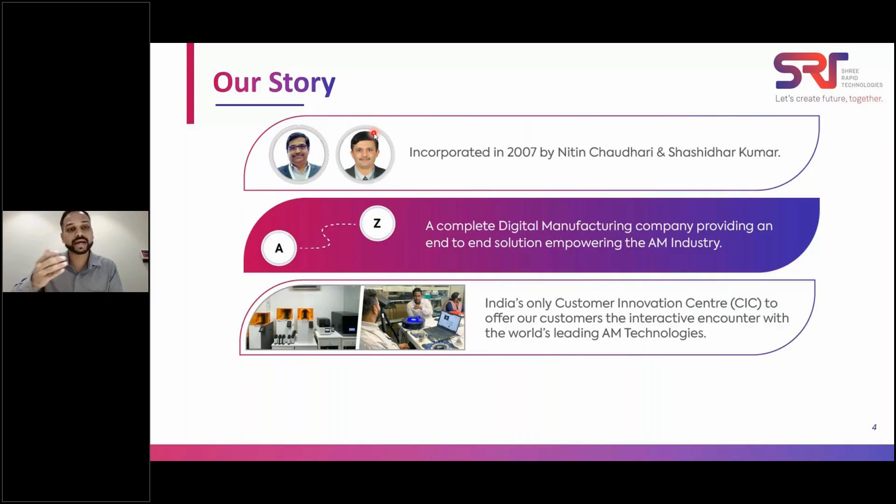Thank you, Sonal. Hello everyone, good afternoon. My name is Lakshman Gad. On the screen you see two gentlemen, Mr. Nitin Chaudhari and Mr. Shashidhar Kumar, who co-founded Shree Rapid Technologies in 2007 and established it as a provider of digital manufacturing solutions. We have a pan-India presence with our head office in Mumbai and branch offices in Delhi and Bangalore. Backed with 17 plus years of experience, we are a team of 95 plus and have installed more than 850 machines across India.

We offer a wide range of 3D printing technologies, starting from filament-based FFF 3D printers, resin-based SLA and DLP 3D printers, powder-based SLS 3D printers, metal 3D printing, multi-jet printing, and even ceramic 3D printers.

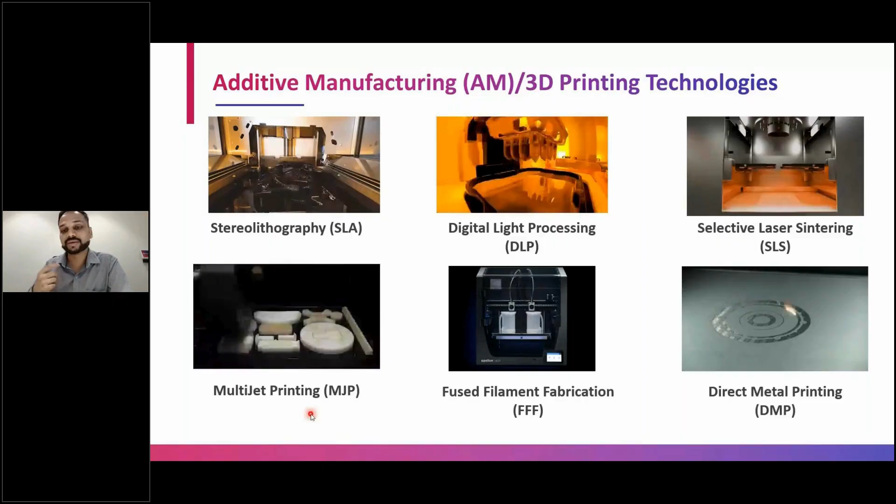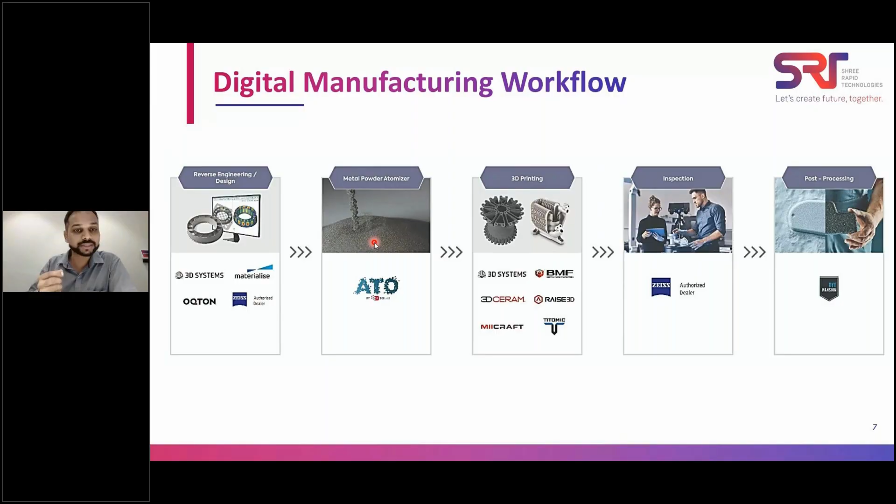The system you see here, ATO, will be discussed in detail during today's session by the expert Mr. Marius from 3D Lab. The most important part of Shree Rapid Technologies is our Customer Innovation Center, CIC, located in Mumbai, Marol, where customers can come down and understand the different technologies in 3D printing. You and your team are welcome to experience and witness the live working of different 3D printing technologies at our facility in Mumbai. So that was a brief presentation about Shree Rapid Technologies.

You should know that 3D Lab was founded in 2007 and we started as a service bureau. One year later, we signed a company agreement with 3D Systems. We are a reseller of 3D Systems here in Poland, like ShreeRapid in India. Few years later, in 2016, we signed a very similar agreement with Coherent as a partner.

Nowadays, they are called 2OneLab, and they are a manufacturer of small 3D metal printers. This time was crucial for us because between 2008 and 2016, we sold a number of metal printers, and those customers started asking us questions about new alloys, about small amounts of powders for testing and research purposes. That's why we realized there is a niche for a small and compact atomizer.

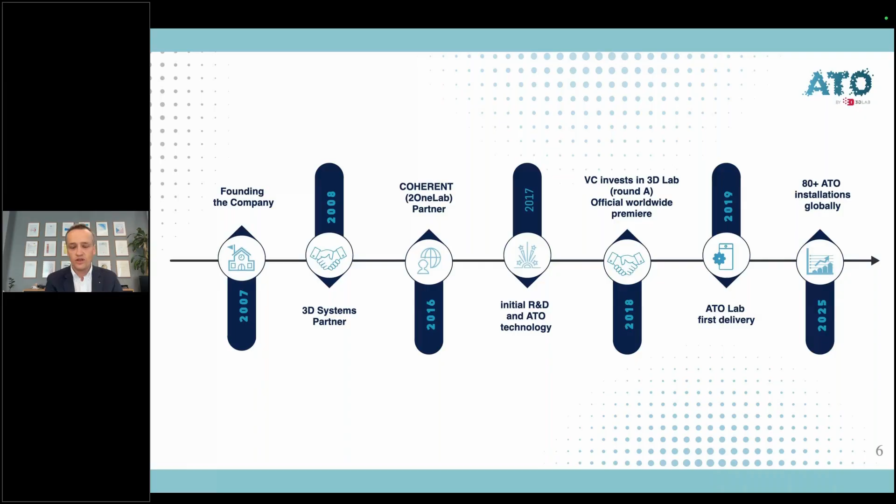That's why in 2017 we started investigating our ultrasonic atomization technology, which was born here in 3D Lab. The effect of that was the acquisition of an investment partner in 2018, and then we launched the first device in 2019. Since then, we've already sold more than 80 machines worldwide.

As you can see, our technology is closely related to the bottlenecks in the metal additive manufacturing industry and gas atomization technology, mainly because of the limited list of materials you can create with the classic gas atomizer, the very high price of those solutions, high operating costs, large space requirements, and a very slow material change process.

Based on our customer experience, if you would like to ask a big company equipped with a classic gas atomizer, you cannot ask them for a small amount of powder. In many cases, the minimum amount of powder you can order is 100 kg or 150 kg, and the material change process is very slow, as I mentioned. That's why it's not profitable for them to work with you with a very small amount of powder, like a few kg.

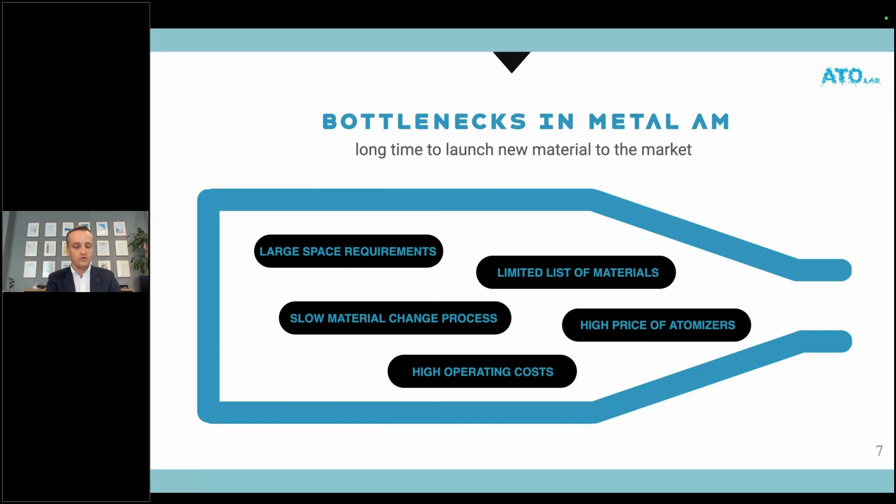During the creation of our technology, we were guided by the idea to avoid big construction and to avoid open fire. We believe we achieved three major goals by creating a very small and compact machine: to speed up new materials development, but most of all, we can propose it with a very, very affordable price.

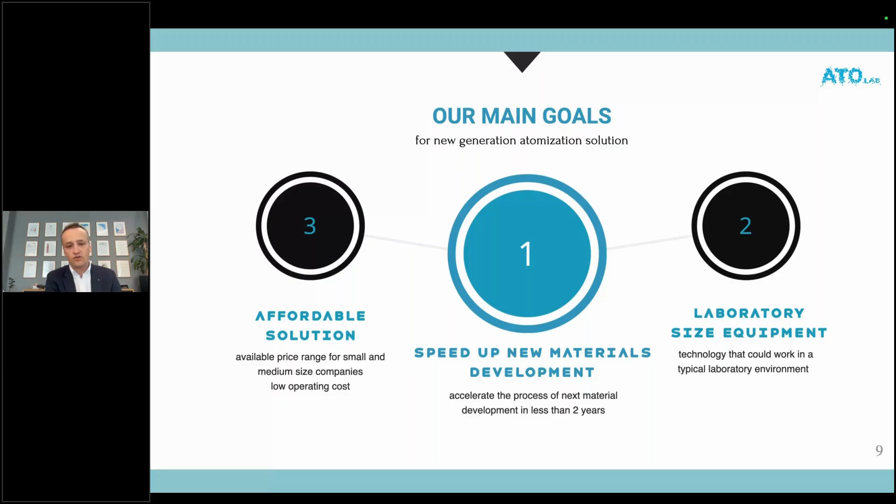All our efforts resulted in the creation of the AtoLab Plus ultrasonic atomizer. Nowadays, we are proposing already a third generation of this device, which can work with both TIG or plasma heat source, and which can be equipped with 4 ultrasonic modules. Later, I will explain what we can do with 4 ultrasonic frequency modules.

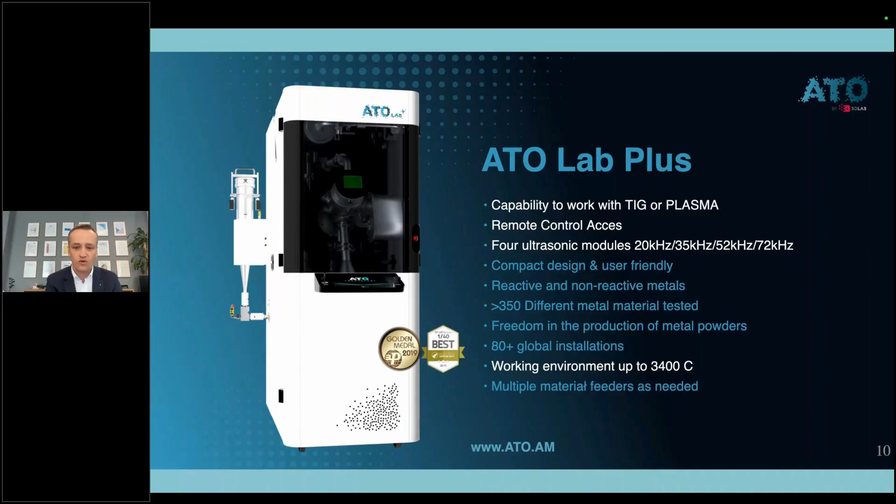The machine itself is really compact, very user-friendly, and it can work with both reactive and non-reactive materials. We already tested more than 350 different materials, and we can work with materials with a melting point up to 3400 degrees. For another group of our customers, we also developed a special version of this device.

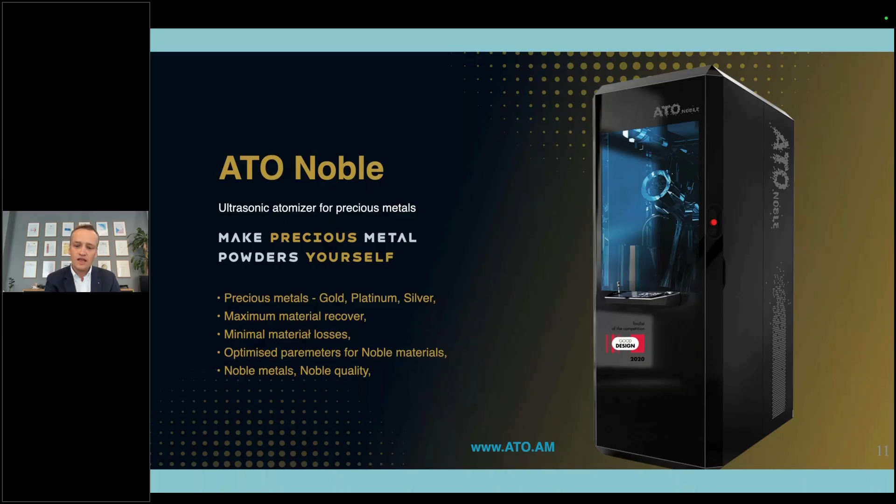The technology is the same, but the machine is called ATO Noble, and it's dedicated for precious materials like platinum, gold, silver. Many of our customers from different industries, like electronic goods, jewelry, or even the medical industry, ask us for precious materials. With this machine and a special filtration system, which allows our customer to recover almost all the powder from the filtration system, this is a very beneficial version to work with precious materials, like I mentioned.

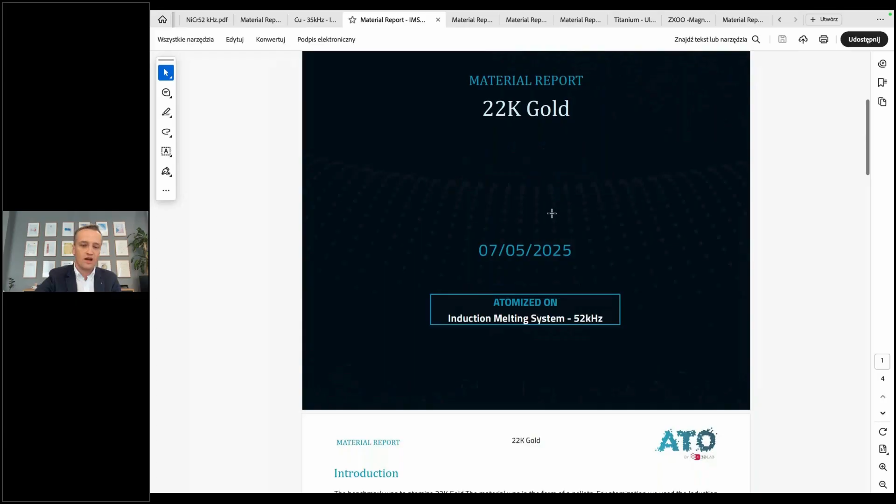Gold - we already tested few types of gold, also platinum and other precious materials. The effect of that is very good quality metal powder, like this report I can show you right now from a 22 karat gold atomization process with our induction melting system and a 52 kilohertz setup. The general rule, as I will mention later, is the higher the frequency, the smaller the particle size distribution. So depending on our customer's needs, we can change the particle size distribution while keeping very good flowability and great sphericity.

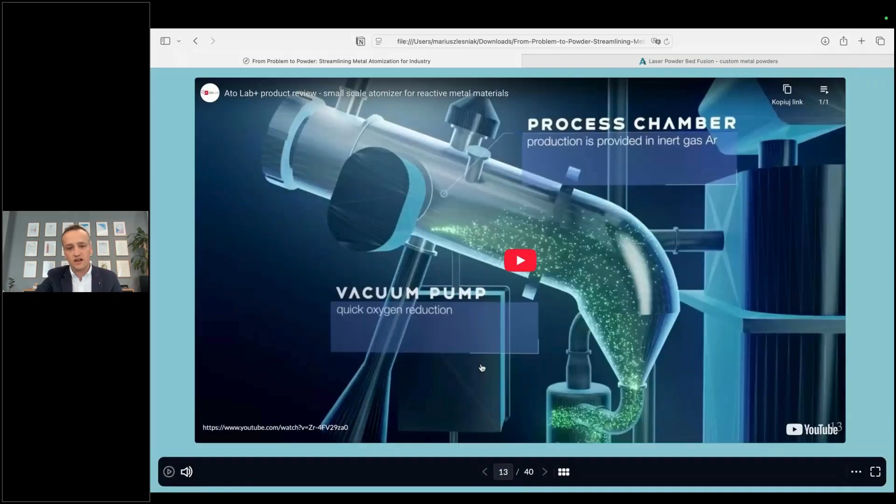Right now, I would like to tell you more about the technology itself. For both machines, like ATO Lab Plus or ATO Noble, it's the same.

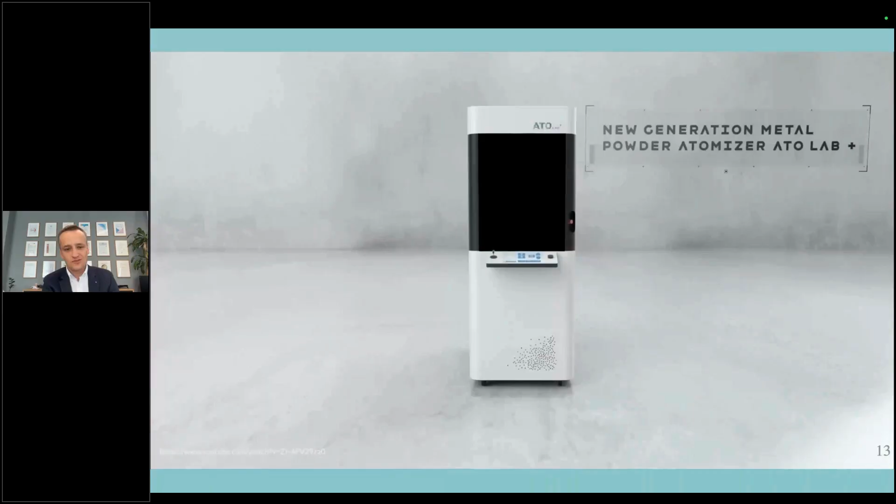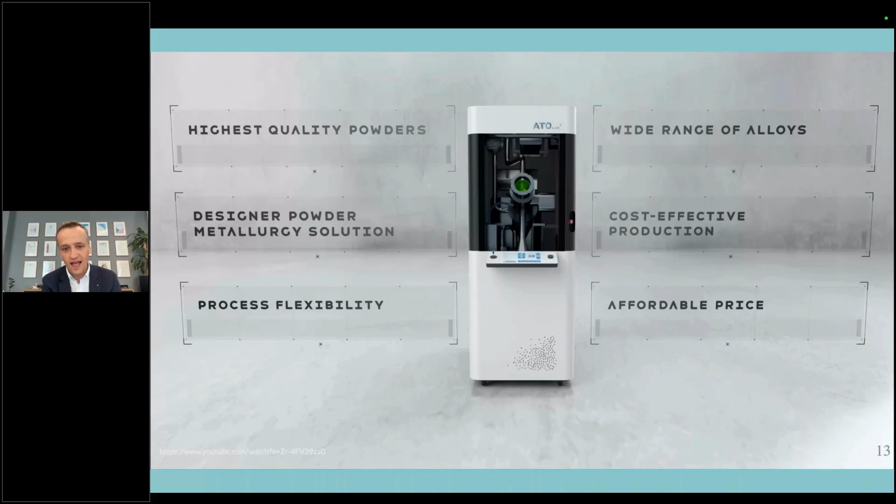As you can see on this video, the machine itself is very compact. My favorite comparison is to a classic refrigerator, maybe a little bit bigger. It's equipped with a very nice control panel. The position of the operator is very upright, so it's very convenient to work with the machine. As I mentioned, it's dedicated for both reactive and non-reactive materials. In the middle of the video, you can see a process chamber, the part with the green light. In the process chamber, we can work with multiple different materials, and we can work with multiple different feeding systems.

On this video, you can see a wire feeding system. The melting tip is the place where atomization happens. TIG is our heat source to melt the input material on top of the atomization platform, and this is the heart of our device.

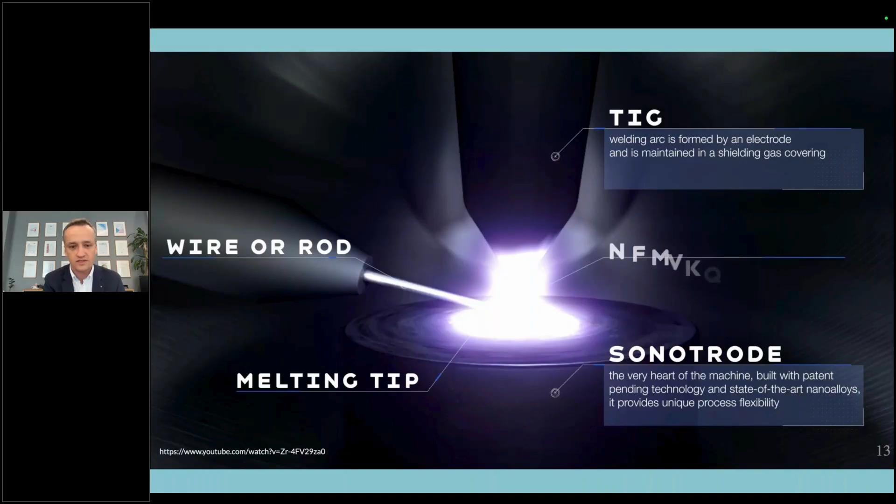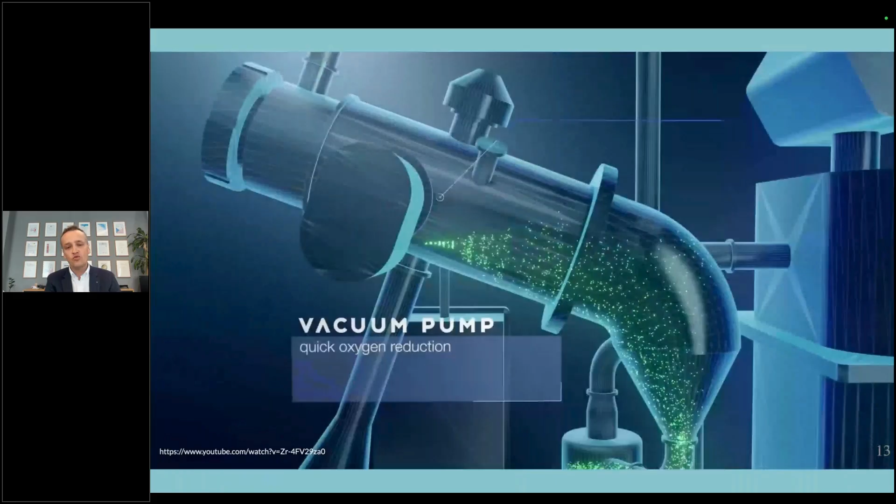The atomization platform is connected with the ultrasonic generator, which means at a certain amplitude with a certain frequency, we can eject perfectly spherical metal powder from the molten metal. Thanks to the argon gas, which is our cooling and transportation gas, we can move all particles through the chamber and through the cyclone, directly to the collecting container.

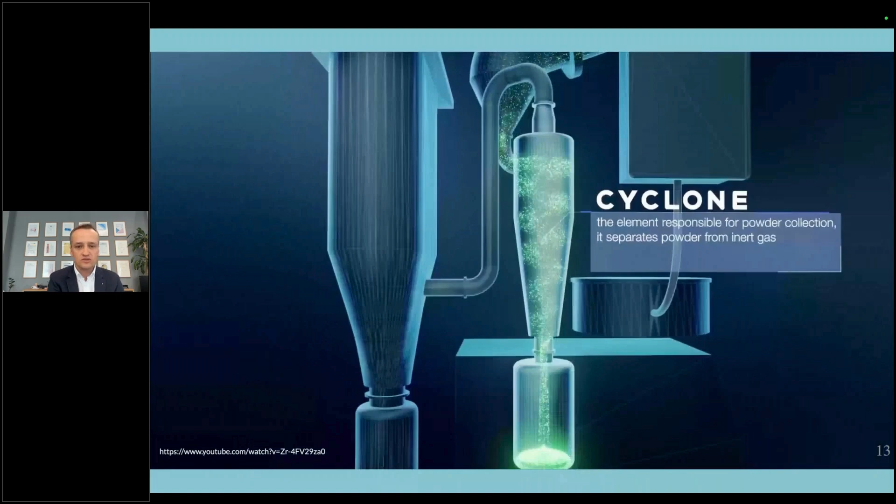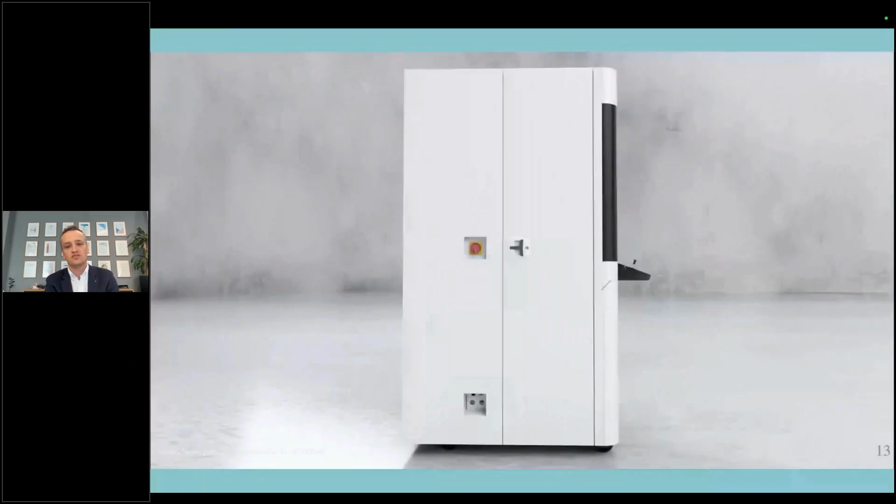All dust or fumes below 10 microns go to the long life filtering system. It's very important to underline this filtration system because it's pretty unique. It was specially designed for this machine, and it's a long life filtering system. To be honest, none of our customers since 2019 have asked us for a new filtration system.

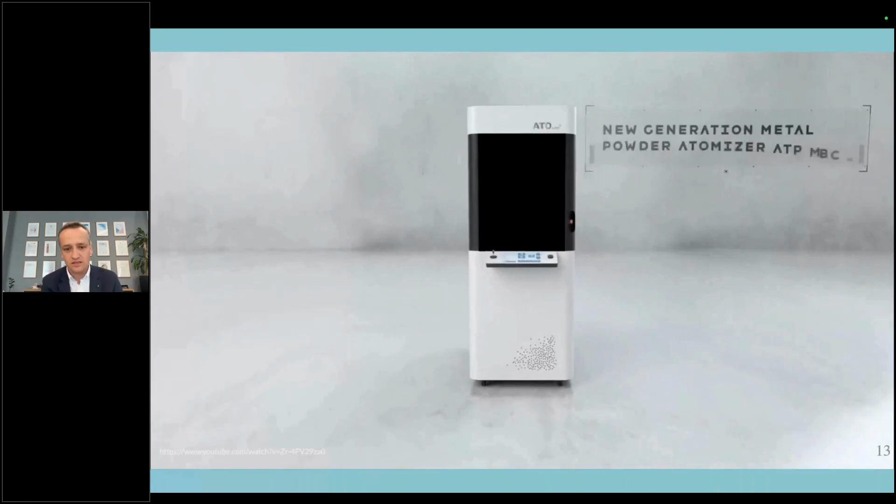It means whenever you are working with reactive or non-reactive material, and even if you're swapping between those materials quite often, you don't need to change the filtration system. One more time, this is not a standard HEPA filter. We can extend the lifetime of the filtration system by additional semi-automatic procedures, which can be released from the control panel by the operator.

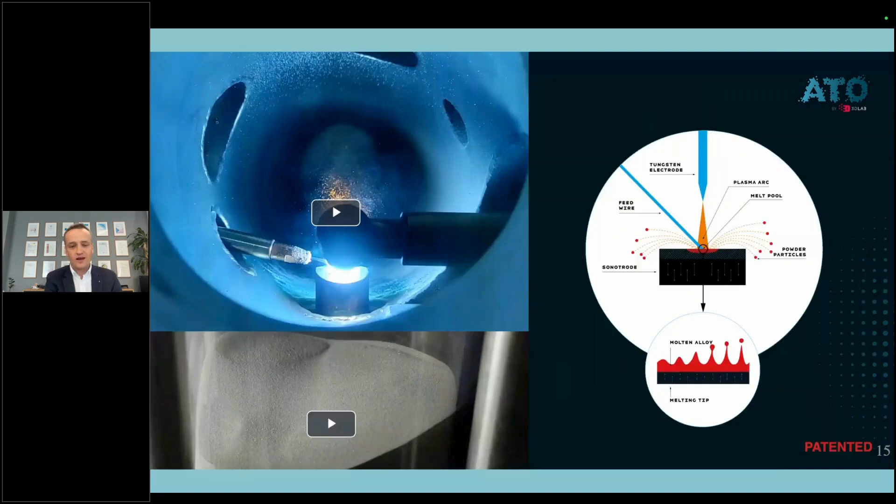Right now, I would like to focus on the efficiency of the atomization process. Maybe you already know that our machine, the basic module as I can call it, is equipped with multiple different feedstock options.

For now, you can see the process of atomization from the wire. On the right-hand side, you can also see a very simplified scheme of how the technology works. More or less, this is the same thing I was talking about during the video.

We need to put the input material into the system. Then with the plasma or TIG, we can melt the input material on top of the atomization platform, and we can eject perfectly spherical metal powder from this molten metal.

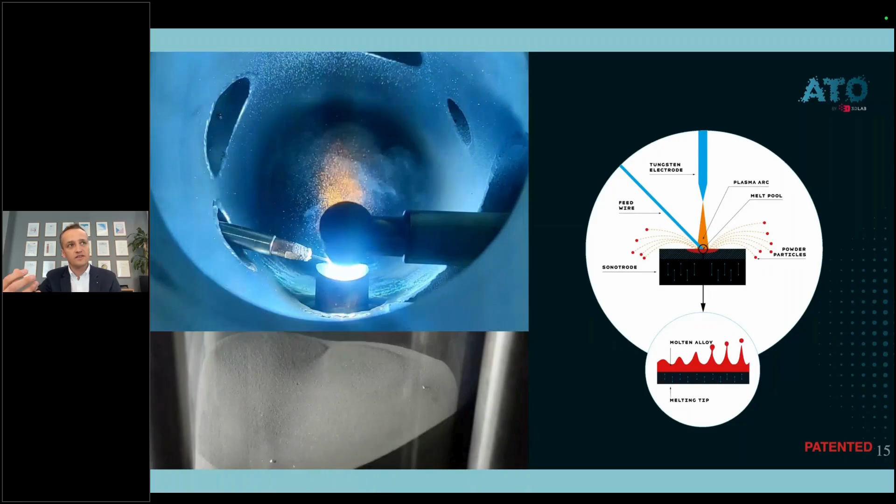To work with the wire is very convenient for the operator. You can imagine a big spool of wire you put into the system, and the process can be almost automatic. We can also equip our customer with a remote control tablet.

Then you can go to a separate room and check the process. You can stop the process. You can control all the most important settings remotely.

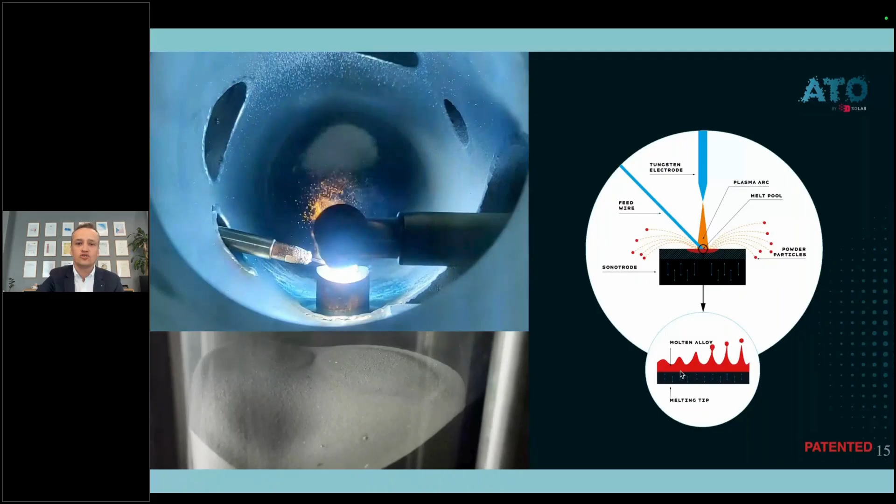As proof, I would like to show you a very short video from the atomization of nitinol for one of our customers. This customer shared with us a big spool of nitinol wire, which we put into the system.

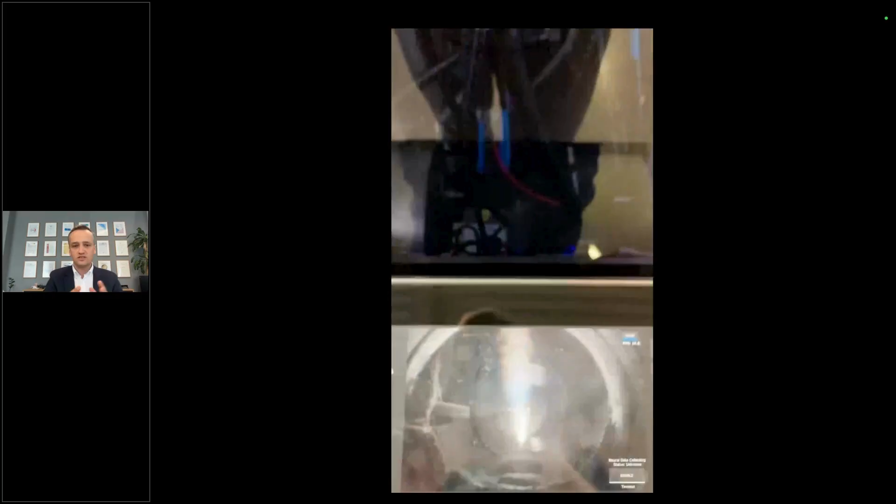We fixed the feeding rate and set up the automatic torch movement. As you can see right now, the process is fully automatic. At the same time, the operator can go elsewhere and check the atomization process from time to time.

As I mentioned, you can do this with the wire because you can put a long spool of wire into the system.

But our machine and the basic module, as I mentioned, is not only a wire feeding system. We can equip our customer with multiple different rod feeding systems, like a single rod feeding system, which is a great option for an R&D department whenever you need to work with even a small amount of powder or even a bent rod.

You can also use a custom feeding system, because some customers in some cases ask us for irregular shape input material, as they would like to work with TIG or plasma, for example with refractory alloys. So we can prepare a custom feeding system for those customers.

But to increase the efficiency of the process, for example from rods, we also developed a revolver rod feeding system or multi-rod feeding system, which allows you to work with multiple rods or even one very long rod, more than 1 meter in length.

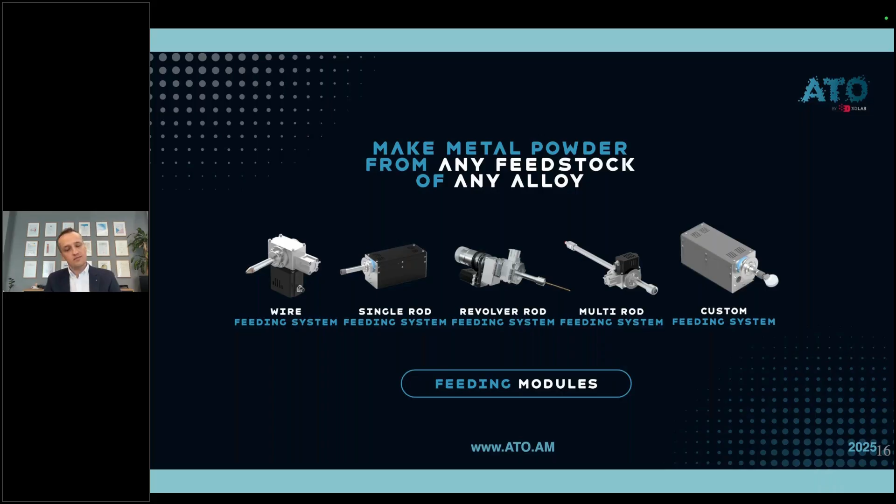Right now, I would like to tell you more about the possibilities to change the particle size distribution, which is very important because many of our customers, depends on the industry, can use or can be equipped with different 3D metal printers like LPBF, EBM technology, or DED technology.

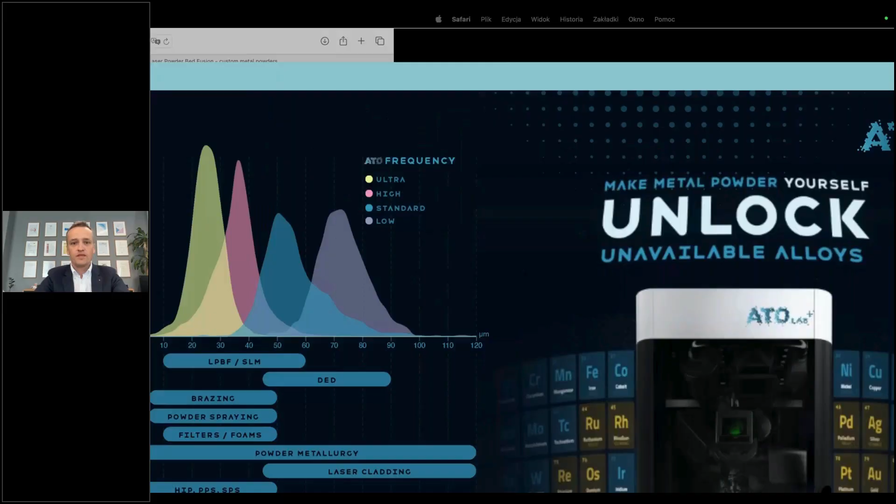For those customers, we improved our system. I will show you this here. On this graph, you can see 4 different frequencies. The basic machine is equipped with a 35 kilohertz ultrasonic module. It allows it to work with the biggest amount of the powder between 40 to 60 microns, which is more or less a gold standard for, for example, LPBF technology.

But for those customers who are asking us for smaller particles, we can switch to smaller particle size distribution by implementing a higher frequency system, like for example, 52 kilohertz. Another group of our customers asks us for even smaller particles. That's why a few months ago during the TCT Rapid show in Detroit, we presented the ultra high frequency system, 72 kilohertz, which allows you to switch to even smaller particles with the biggest amount of powder between 20 to 25 microns.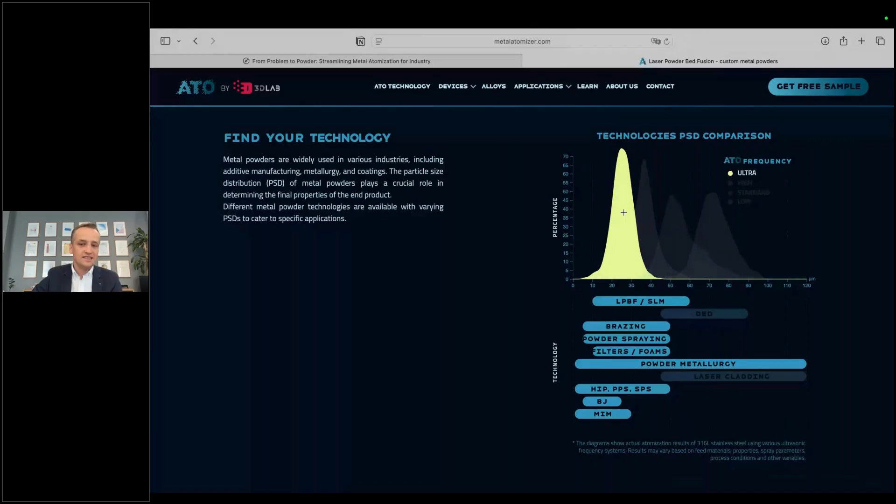We can't forget about this group of customers who are using, for example, DED technology or EBM technology. For those customers, we developed a low frequency system with a 20 kilohertz module. As you can see here, depending on your needs and purposes, you can switch between multiple different frequencies.

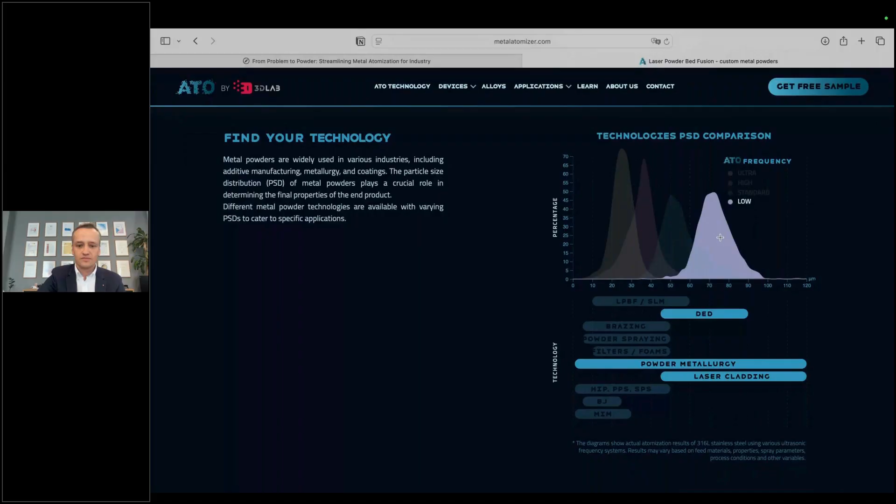Right now, I would like to mention another game changer in our industry: the induction melting system. From the historical point of view, many of our customers asked us for recovery of scraps, failed printouts, and CNC scraps after CNC technology processes. That's why more than 2 years ago, we developed the induction melting system.

Nowadays, we have a second generation of this machine, which allows you to work with completely irregular shaped input material. So whenever you need to recycle scraps after a 3D metal printing process, maybe supports, CNC scraps, or even short or longer bars, you can use the induction melting system, which is much more gentle for the material compared to a plasma source, for example.

So whenever you need to work with lower melting point elements like tin, lead, or magnesium, the induction melting system seems to be the best choice for you. It can work with materials with melting points up to 1500 degrees, and it can turn your scraps, or even another powder, into a perfectly spherical powder with a very narrow particle size distribution.

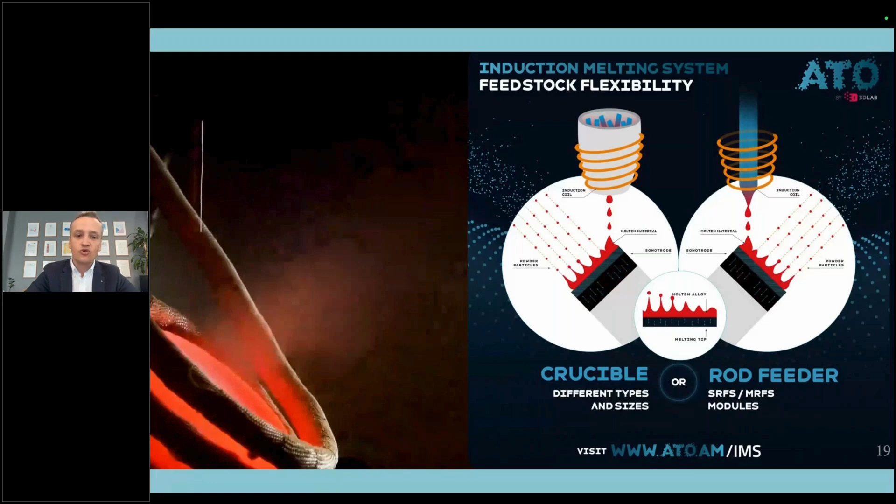I can tell you a great example. One of our customers had a problem with atomization of magnesium. They have been a user of our ATOLab basic module since 2023. But once they asked us to switch to magnesium, they found out that the evaporation for the magnesium was a little bit too high. That's why we proposed they work with the induction melting system.

So we atomized for them highly medical grade magnesium like ZX00 or WE43 magnesium, and we achieved great results with this powder. The sphericity was great, the flowability much better compared to classic gas atomizers, but the most important fact, especially with magnesium, which is a very reactive material, is that we achieved a very safe process with a very narrow particle size distribution, and we kept the purity of the material in terms of chemical composition.

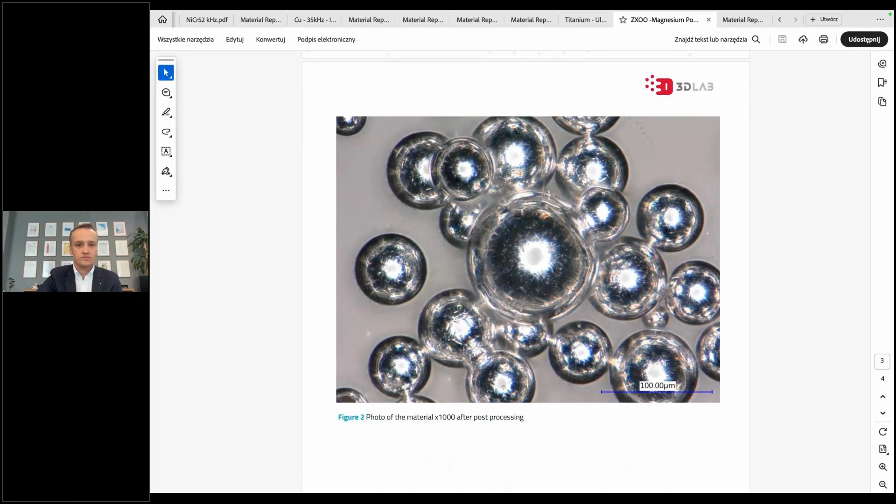Right now, I would like to show you another example of atomization with our induction melting system. Here you can see 18 karat gold, but please imagine different cases and scenarios, because in every case the atomization process with the induction melting system will be the same.

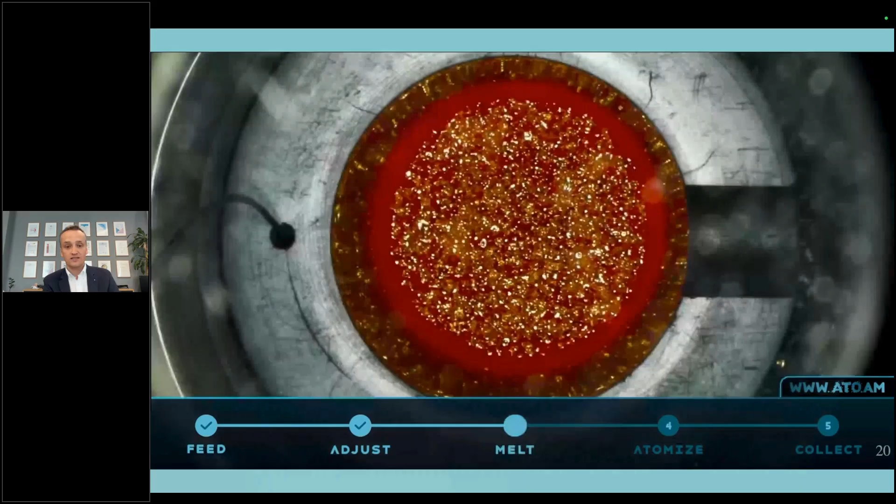On the control panel, we can set the target temperature. We can see the process of the melting point thanks to the mounted camera. We can also check the temperature thanks to the mounted thermocouple inside of the crucible. So we can control all the most important parameters.

When the material is fully liquid, we can release it from the crucible onto the atomization platform, and we can achieve an efficiency of the process between 2 to 4 times better compared to the basic module. And of course, after the atomization process, we can collect the powder in our collecting container.

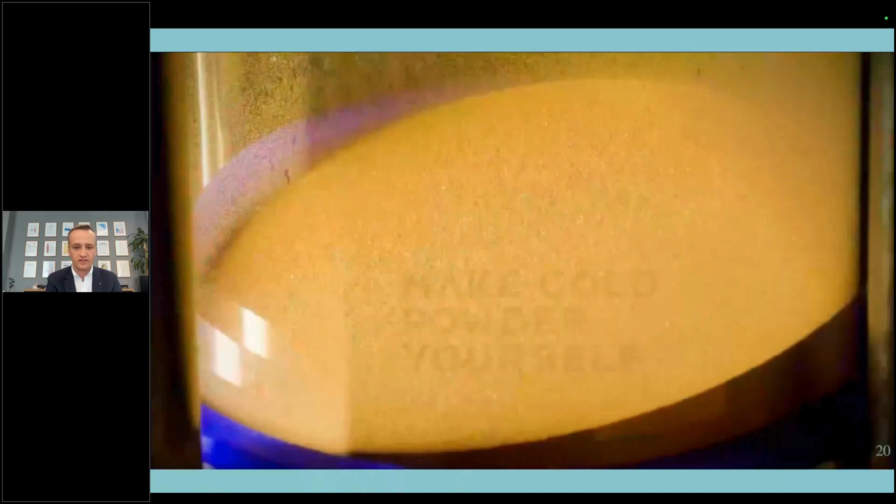With this solution, the AtoLab Plus and induction melting system, we can achieve a full loop. We can recycle the material, recycle scraps or CNC chips. We can atomize, turn into a perfectly spherical metal powder, then sieve, because it seems obvious that we need to sieve the material after the atomization process.

Another machine which can help us improve the research and efficiency of the process is our AtoCast. This is a self-sufficient induction vacuum casting machine and furnace which allows you to cast rods. The biggest difference from the induction melting system itself is that we do not have any atomization process here, this is only a vacuum casting furnace. But in that case, we can achieve a melting point for materials up to 3000 degrees.

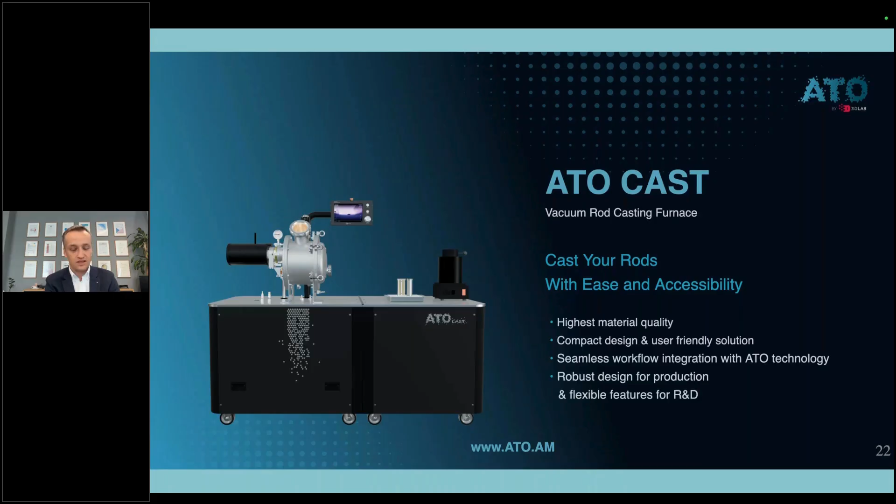That's why we can work with multiple different scenarios depending on customer needs. Imagine you would like to work with scraps - my first thought would be proposing the induction melting system. But if you tell me you would like to work with materials with a melting point higher than the possibility of our induction melting system, in that case we can use our casting vacuum furnace. We can cast rods which are perfectly homogeneous, and we can also pre-alloy the material. With those cast rods, we can go to our main module.

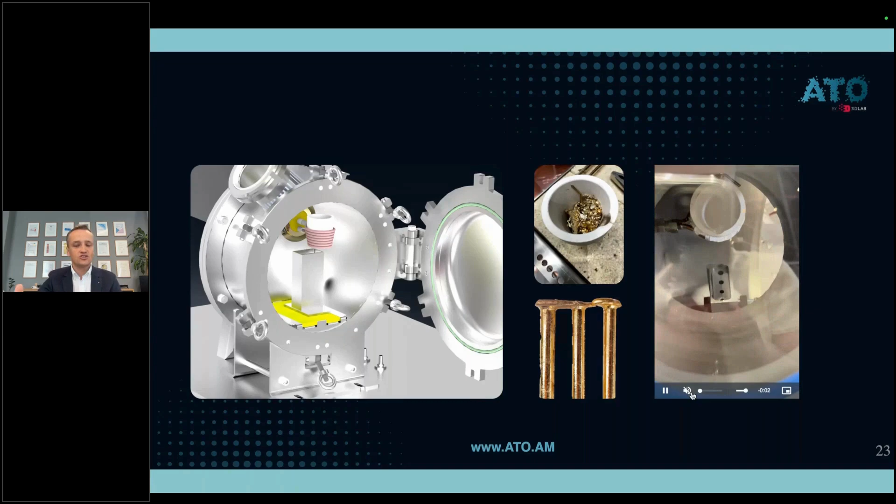Thanks to the AtoCast, we can achieve this loop. So whenever you need to work with scraps, different or irregular shape input material, you can turn this material into a rod form, then atomize it in our basic module, and the rest of the process is the same - you need to sieve the powder, then go with the powder to your technology, like 3D printing or cold spraying.

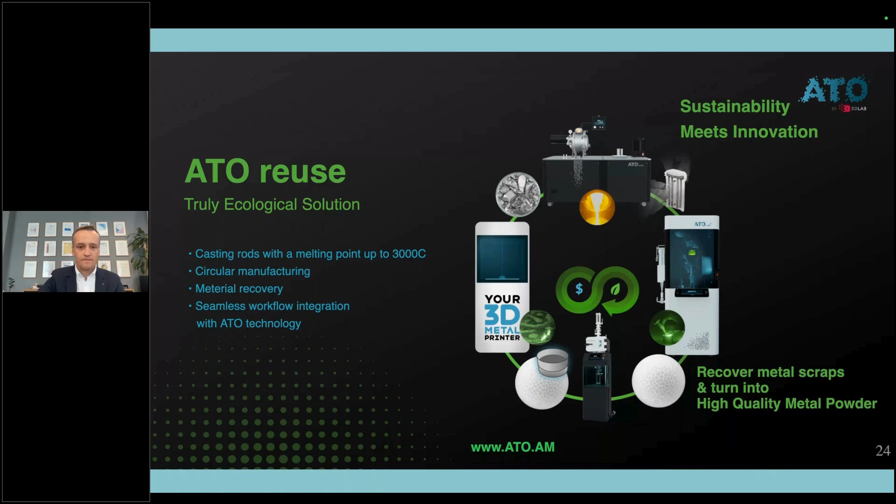Right now, I would like to mention more about the quality of the metal powders. After many tests, we can be sure that the oxygen level, particle size distribution, and chemical composition can fulfill even our demanding customer needs. First of all, you need to know that we are testing a lot of materials - we already tested more than 350 different materials for the induction melting system together with our main module.

In our case, we are not using any force, we are using only vibration, the ultrasonic vibration. We put the material through the platform, and that's why we can eject a perfectly spherical metal powder from the molten metal.

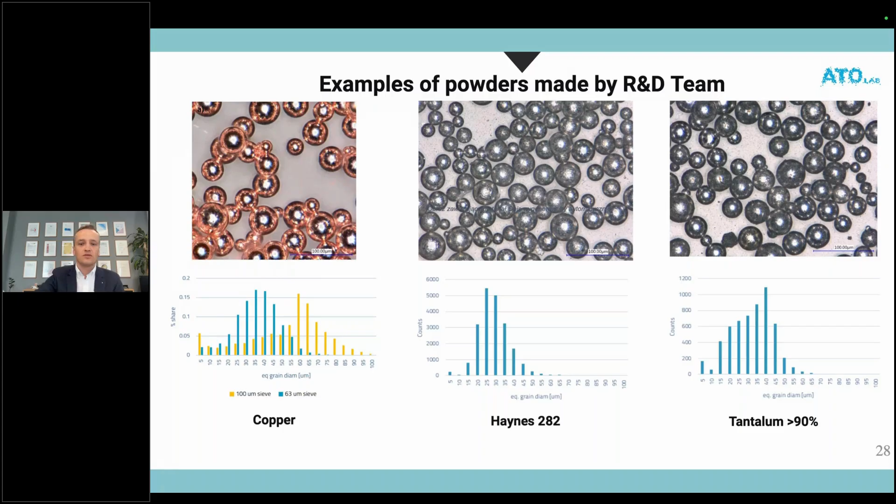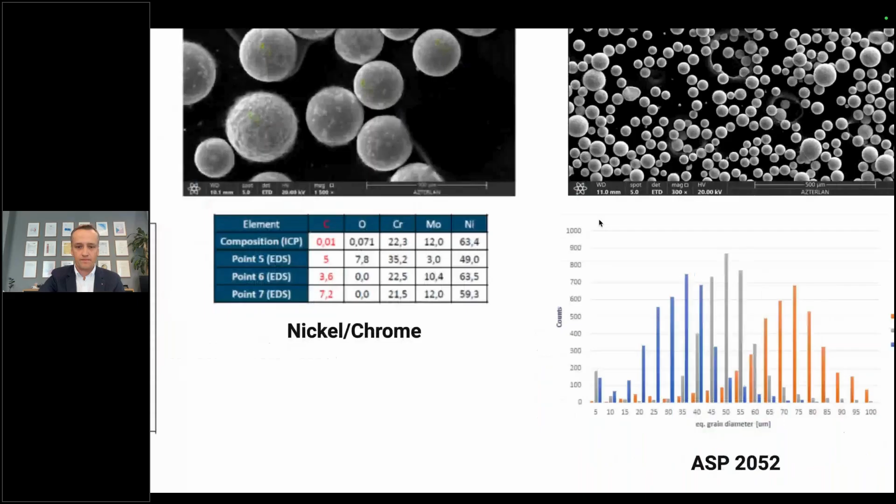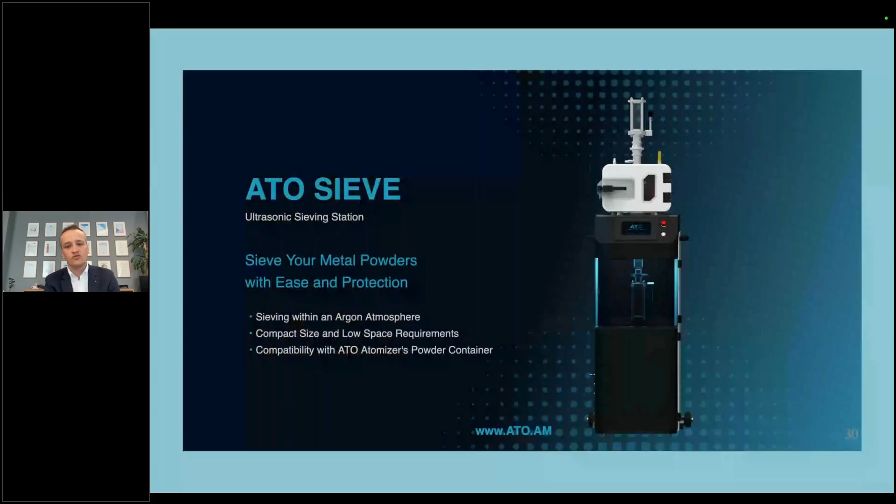It's worth mentioning that whenever you are atomizing the material, it seems obvious that you need to sieve the material after the atomization process.

To maintain the quality of our powder, we developed our ultrasonic sieving station, which is fully compatible with our ATO container. It means, for example, you can close the valve in your atomizer and put your powder in a safe way under argon atmosphere into your sieving station, and sieve your powder also under argon atmosphere. So whenever you need to work with highly reactive material which can oxidize a lot, like magnesium or titanium, you can use the ultrasonic sieving station, which improves the sieving process by avoiding clogging.

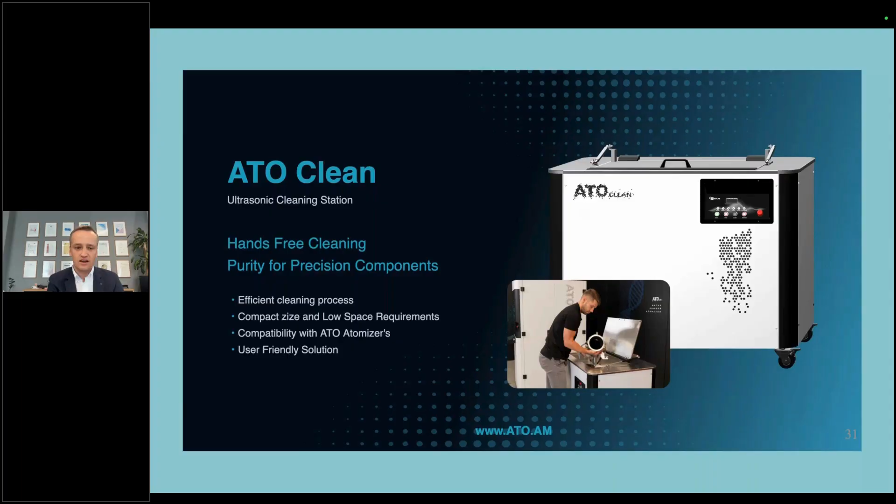ATO clean is very important due to the context behind this webinar, because as I mentioned a few minutes ago about the slow material change process in classic gas atomizers. With our machine and ATO clean, you can swap between one material to another, avoiding cross-contamination within 2 hours. This is a fully automatic process.

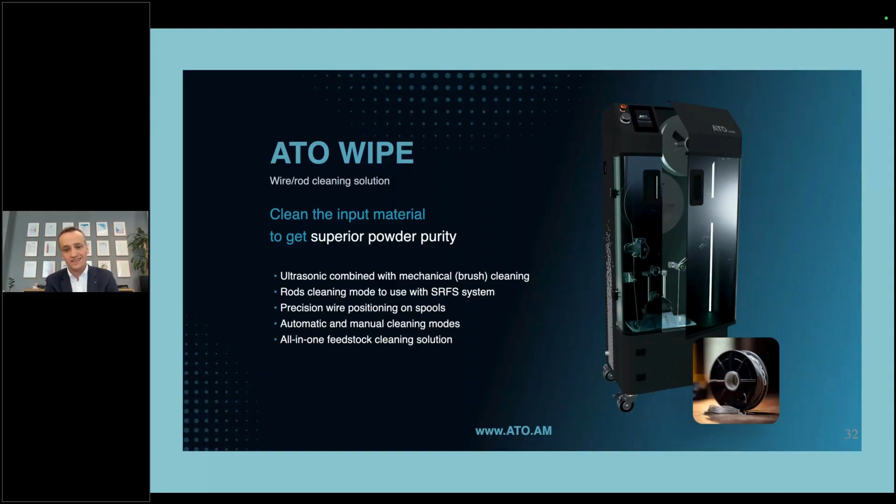Also, something new in our portfolio, it's ATO Wipe. Sometimes our customers send us very dirty material, both wire, rods, or even scraps. We found that the grease film on the top layer of the input material can disturb the atomization process. That's why we developed this automatic cleaning unit, which helps increase the efficiency of the atomization process.

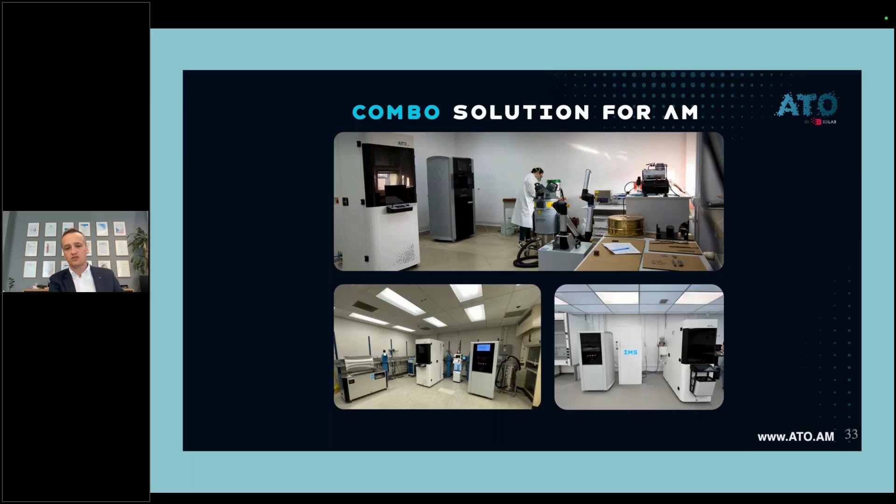I would also like to mention the situation when our customer can purchase from us, or from our partners like ShreeRapid, a combo solution. Whenever they need to work not only with new materials, but maybe print some parts or test new powder with their 3D metal printer, we or our partner can deliver a combo solution - not only the atomizer, but also a 3D metal printer, depending on your needs. This is a good example of a big machine we delivered to a customer from the gas and oil industry, working with large amounts of powder, especially 316L steel and Inconel, which they create on our ATO Lab solution.

Many of our customers worldwide trust us, and many of them buy a second machine from us. Sometimes they also ask us for multiple updates and upgrades. You should know that we can access all our machines remotely. Obviously, we cannot do this without customer permission, but sometimes, especially for customers working with new materials, such as research centers or universities, they can ask us to connect with their machine and we can help them with new parameters and proper settings for their materials.

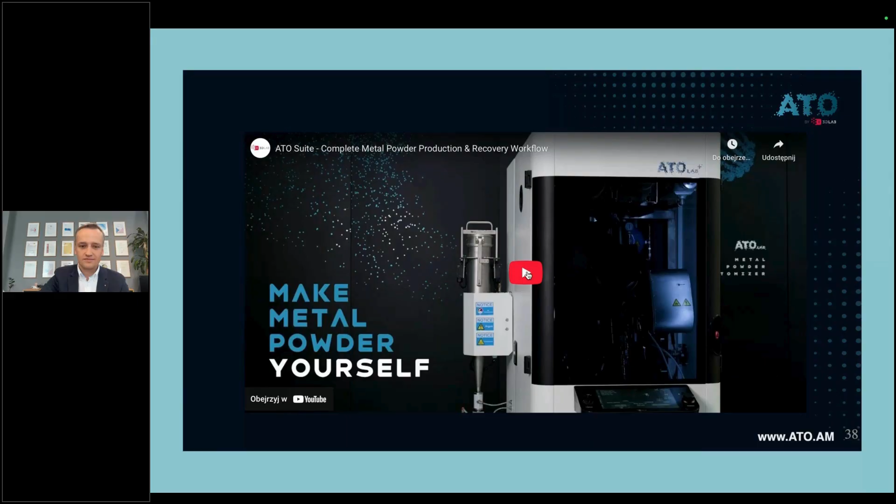Introducing ATO Lab Plus, engineered to make any powder from any metal right when you need it. Simply mount a standard metal wire spool from any alloy, reactive or non-reactive. The device has a small footprint and doesn't need complex infrastructure - just plug in and start atomizing. Built-in long-lasting filters ensure powder and system safety and efficiency.

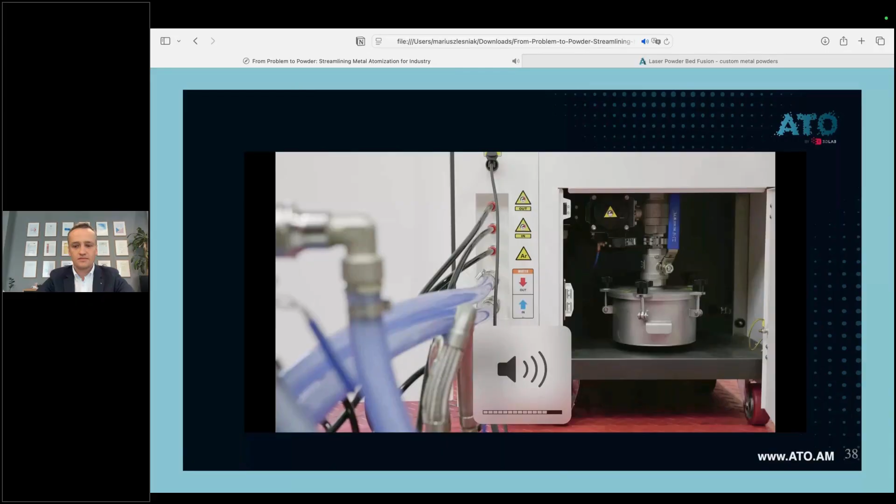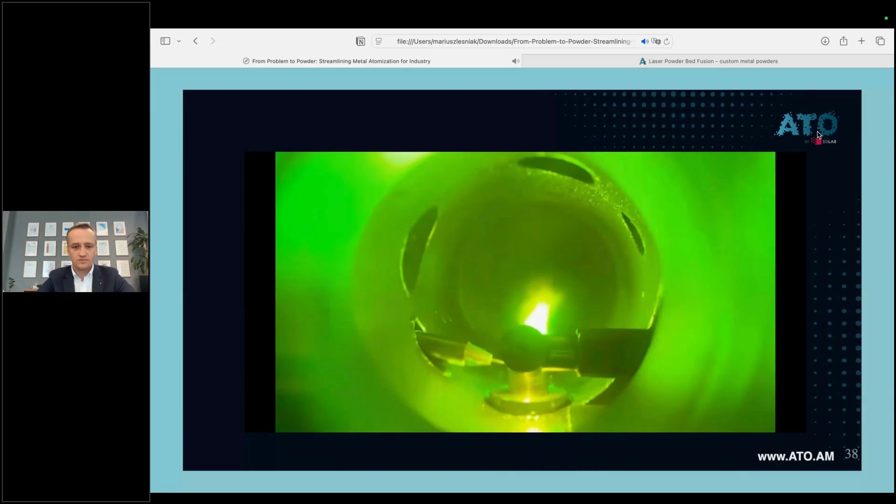The device has a modular construction. Choose the ultrasonic frequency system module to control produced powder size for your application. Use automatic feeding and torch movement features to reach maximum powder production efficiency. ATO delivers highly spherical powder with excellent quality and flowability, ideal for additive manufacturing and beyond. While ATO is making metal powder, your hands are free for other tasks. ATO remote control allows you to control one or multiple atomizers, with a live view of atomization and control process remotely via a dedicated tablet.

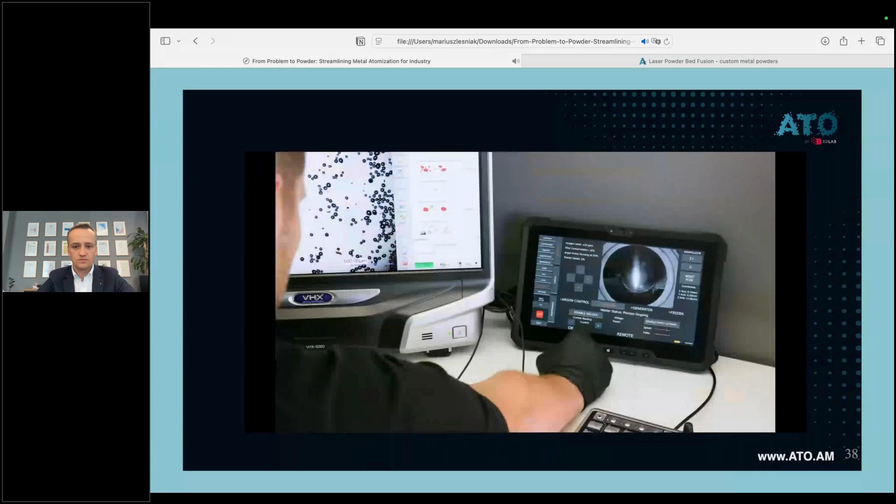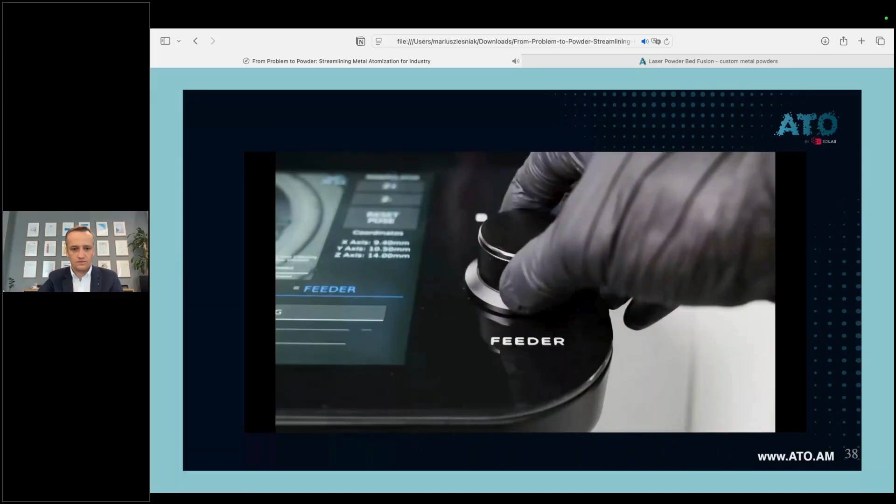All modules are easy to swap, with minimal downtime and maximum flexibility. Change feedstock by swapping the feeding module and make metal powder from rods with the single rod feeding system. Atomize metal rods quickly and efficiently with full control over feeding speed and rotation. Control atomization and parameters in real time with the main touchscreen panel, with dedicated knobs and easy-to-use software.

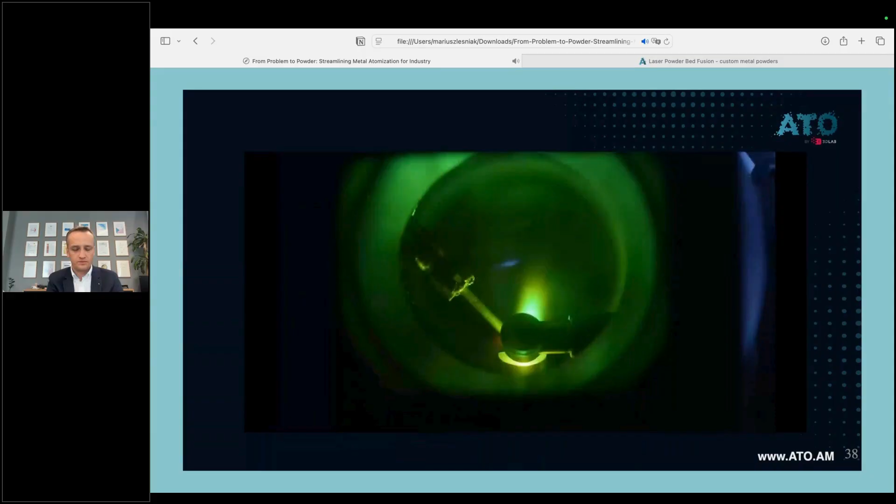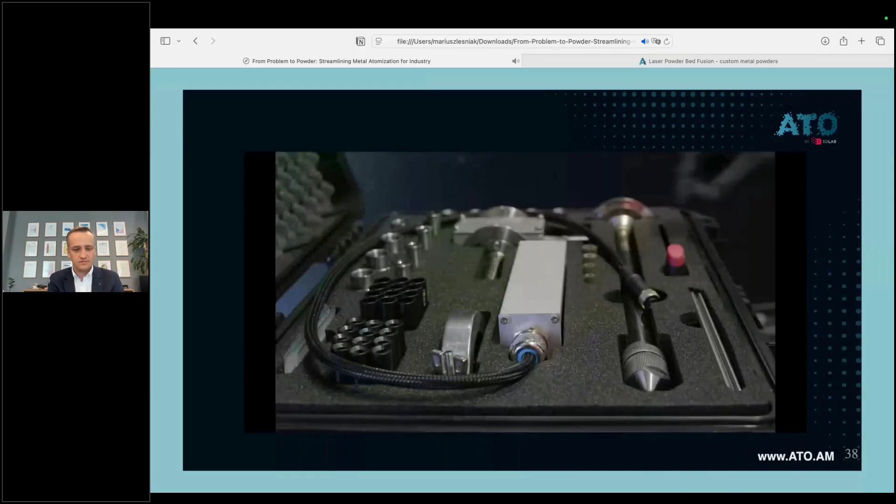ATO ultrasonic metal atomization technology ensures efficient, stable, and flexible powder production. Make high-quality spherical metal powder from your alloys with precision. For bigger production cycles, the multi-rod feeding system is the ideal choice. This module allows you to queue multiple rods in a single atomization run without unsealing the chamber. Simply load your rods and start producing high-quality metal powder.

The feeder offers exceptional adaptability, supporting various rod sizes with ease. When extended production is needed, you can equip the system with a dedicated extension tube, enabling atomization of rods up to 1.2 meters in total length. This minimizes downtime, reduces reloads, and ensures efficient, continuous powder production.

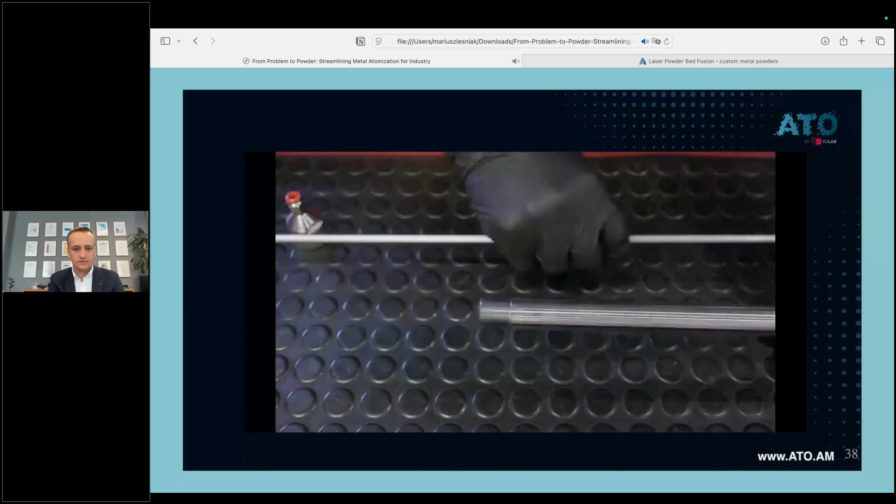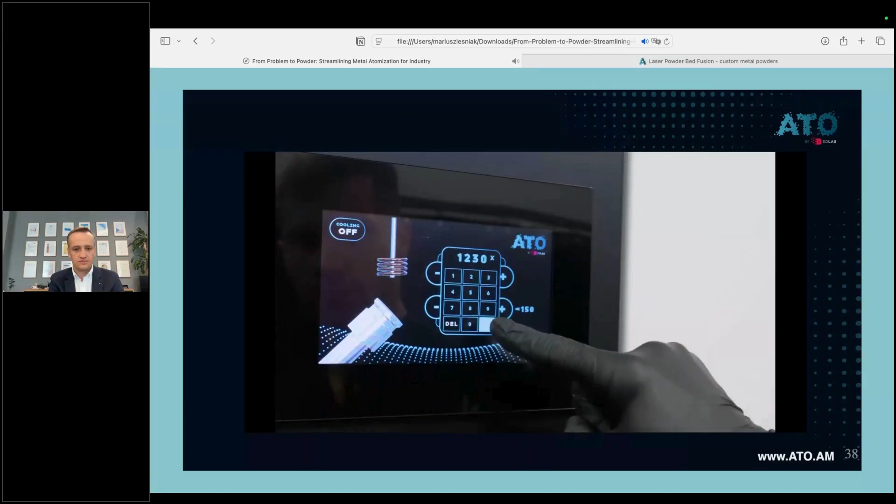Expand your range with the induction melting system, perfect for atomizing metals with lower melting points. When combined with rod-based feeding, it enables fully contactless powder production, ensuring maximum chemical purity. The IMS uses induction heating to warm both the feedstock and the atomization platform, providing a stable, efficient process. Atomization is carried out on our patented ultrasonic tip, which ensures consistent droplet formation and excellent powder sphericity.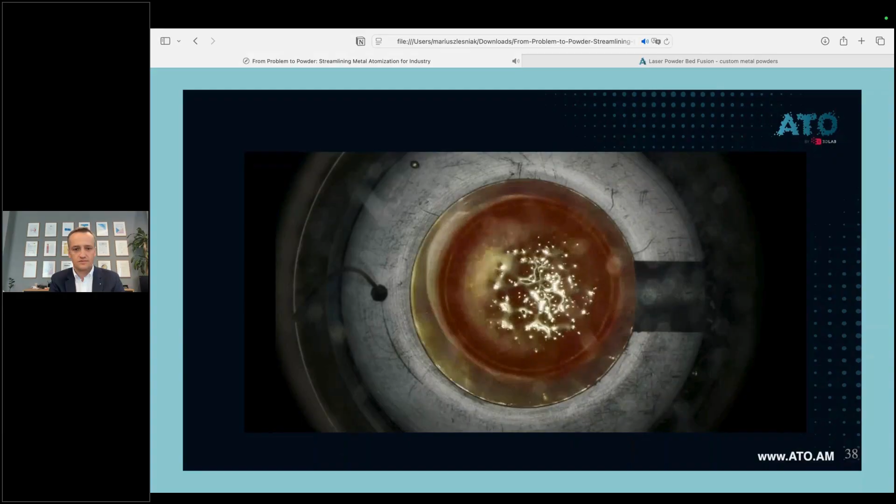Irregularly shaped feedstock or 3D printing leftovers? IMS handles them with ease using crucible-based feeding. Inside the crucible, materials can be fully melted and alloyed through induction electromagnetic homogenization. Once ready, the pressure-controlled pouring system releases the melt precisely onto the atomization platform, minimizing contamination risk and ensuring consistent powder production. With this method, you can atomize up to 350 cubic centimeters of your alloy in one batch.

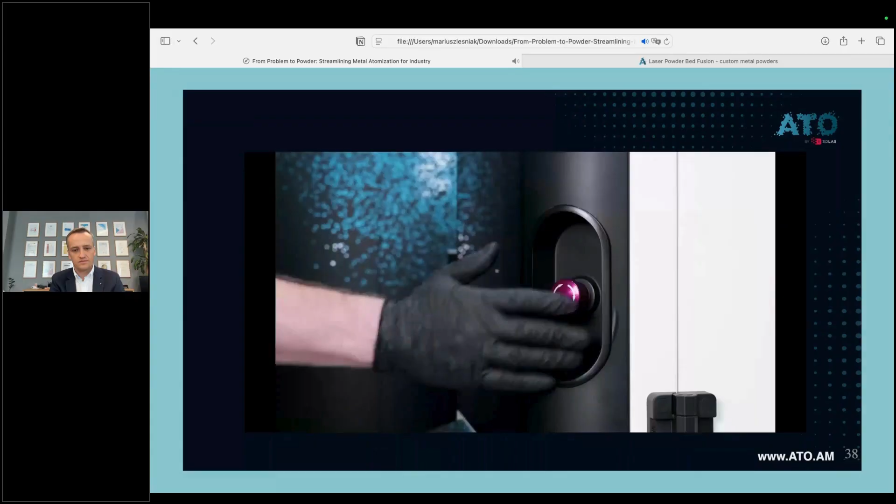Achieve unmatched powder quality and chemical purity, ideal for advanced applications. When atomization is done, turn off the atomizer with one click and collect the produced powder. Our universal sealed powder container keeps material in an inert gas atmosphere to protect from oxidation.

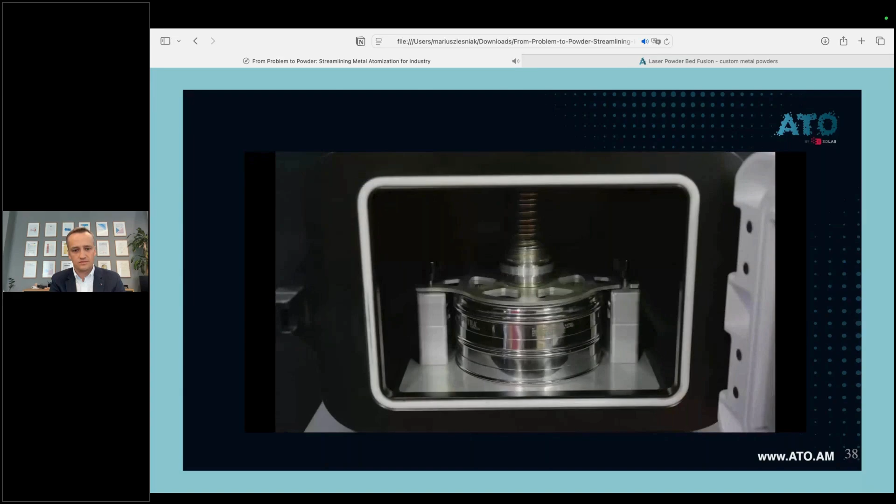Use the ATO sieve to separate powder by size and make it ready to use. It's an ultrasonic sieving station with a sealed chamber in an inert gas atmosphere. Ultrasonic vibration prevents clogging and boosts sieving performance. Efficient, clean, and consistent—sieving made easy.

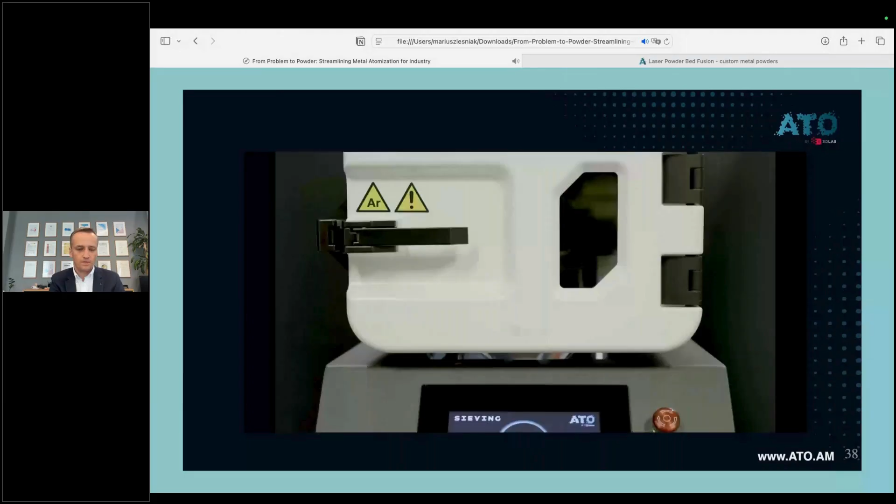ATO metal powders are ideal for use in additive manufacturing and advanced applications, with excellent flowability and narrow particle size distribution. Close the loop and recycle metal scraps from 3D printing with ATO Cast.

It's a professional induction vacuum casting furnace with a compact all-in-one design. Fill the crucible with your metal or 3D printing scrap and mount it securely in the induction coil. By preheating the casting mold, you're reducing the risk of defects during casting.

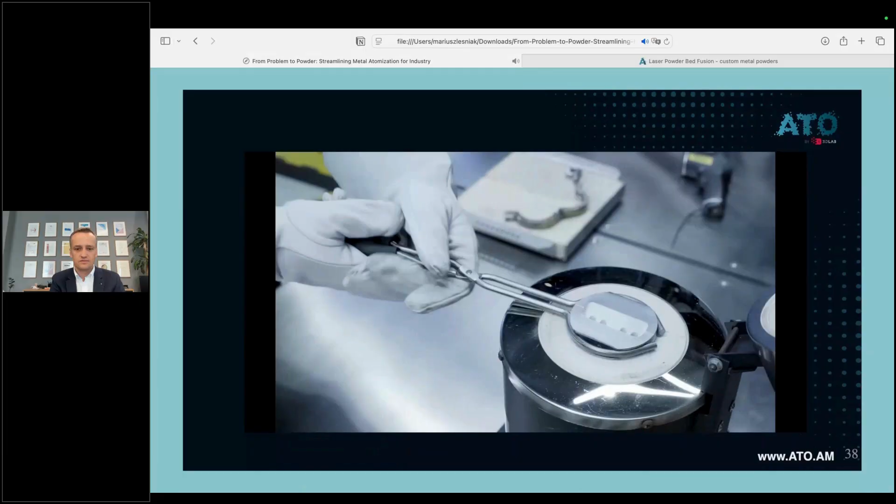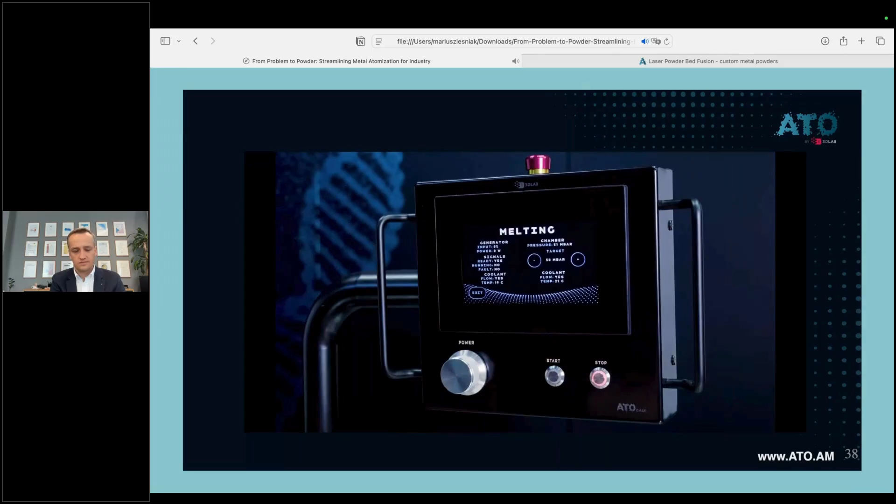Take and secure the mold with a metal clamp and position it directly under the crucible drop spot. The ATO Cast chamber works in a positive or negative pressure version, with an inert gas shield, to reach the highest material quality and purity. When all is sealed, start induction melting on the main touchscreen panel and watch how your feedstock becomes liquid.

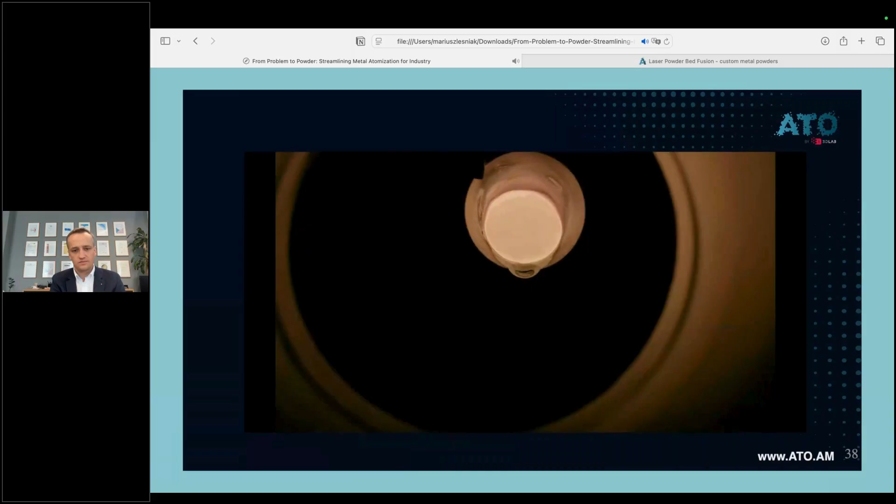The material fully homogenizes with the induction electromagnetic field. Once the melt reaches its ideal state, pour it into the casting mold with a firm motion. Casting is now complete—the rods can be safely extracted and used as fresh feedstock for powder production.

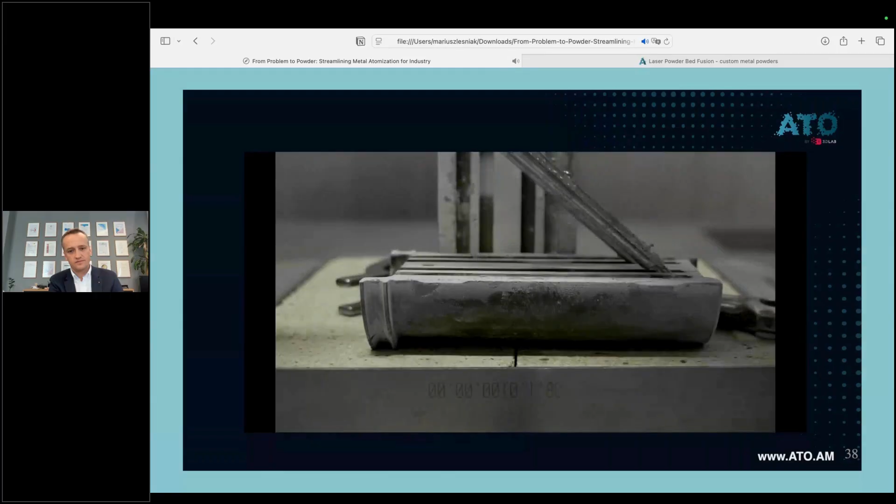The ATO suite is more than a set of machines—it's a gateway to material innovation. It empowers researchers, engineers, and manufacturers to explore new alloys, reclaim materials, and shape the future of additive manufacturing. Make metal powder yourself and redefine what's possible. Visit ato.am.